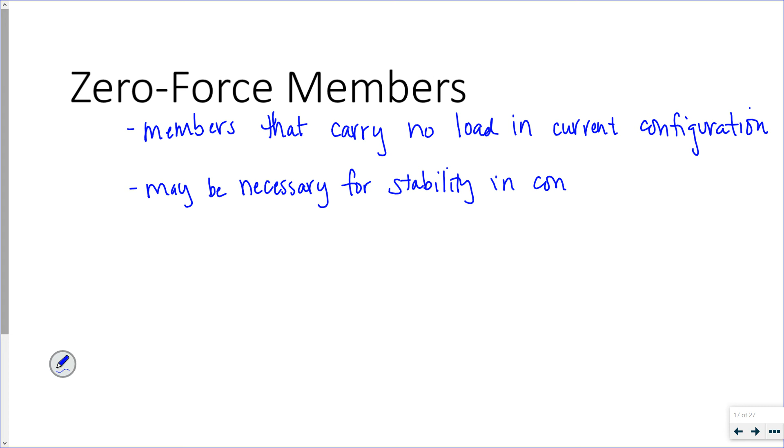So if it's not carrying any load, why is it there? Well, maybe it's necessary for stability during construction, and maybe it's not going to be a zero force member if the loading changes. So they're members that don't have any force in them currently, but they're there for a reason, or were there for a reason, or maybe for a future reason.

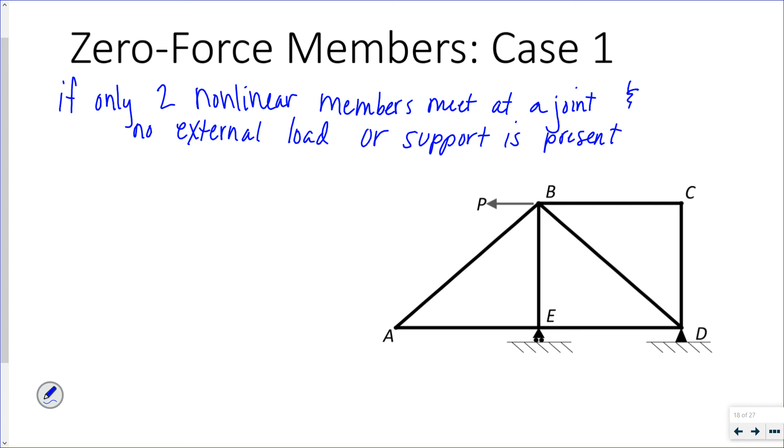There are two different cases of zero force members we can look at. Case one: if there are two non-collinear members that meet - non-collinear meaning they don't fall in the same line - at a joint, and there's no external load or support present, then both members must be zero force members.

That's why zero force members can change - if there is a load, this case doesn't apply. If the loading changes so there is a load at that location, so if they meet and they're not in a line together, and there's no force there, and there is no support, then there is zero force within that member.

There are two pairs of zero force members that meet the case 1 criteria, because there's two. One is if we go look at joint C. I have a vertical member and a horizontal member, and there's no external load or support. So that means that the force in BC is 0 and the force in CD is 0.

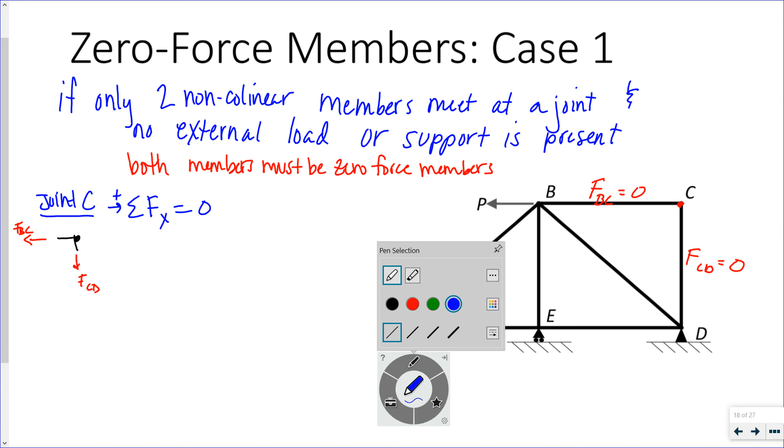How can I prove that? Let's do the sum of the forces at joint C. Sum of the forces in the x direction is 0. If I look at joint C, it has force BC and force CD. If I do sum of forces in the x direction, the only force at C is my force BC. Similarly, if I do sum of forces in the y direction equal to 0, the only force I have is force CD. So they're both zero force members. They meet the criteria for case 1.

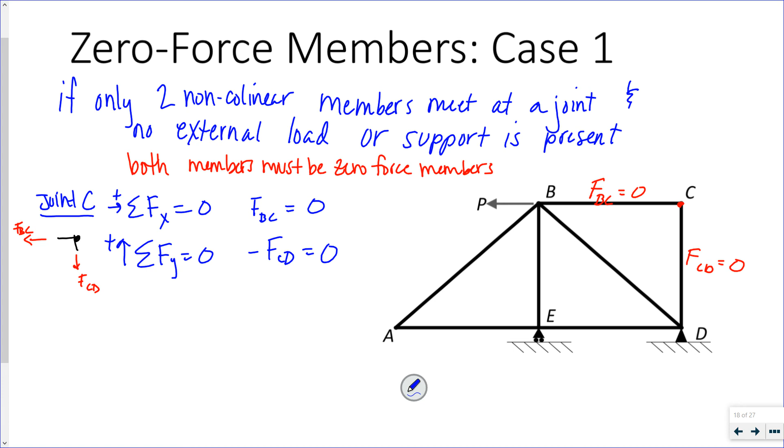Let's look at joint A. I have a horizontal member, FAE, the force from FAE - here's A. I have the force from that horizontal member. I have a diagonal member AB, and the force from that.

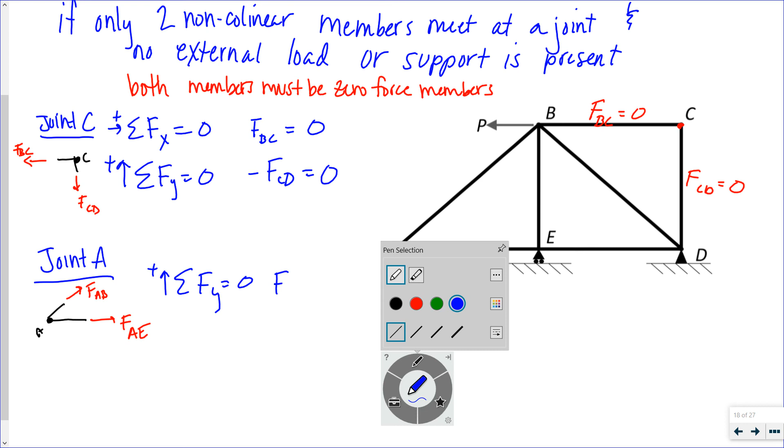Let's say I do the sum of the forces in the y direction is 0. The only y direction force I have is the vertical component of the force in member AB. So that means the force in member AB is 0. If I look at the sum of the forces in the x direction equal to 0, I should have my ABX component plus my force in member AE equal to 0, but I just said this was 0. So that means the force in AE also has to be 0.

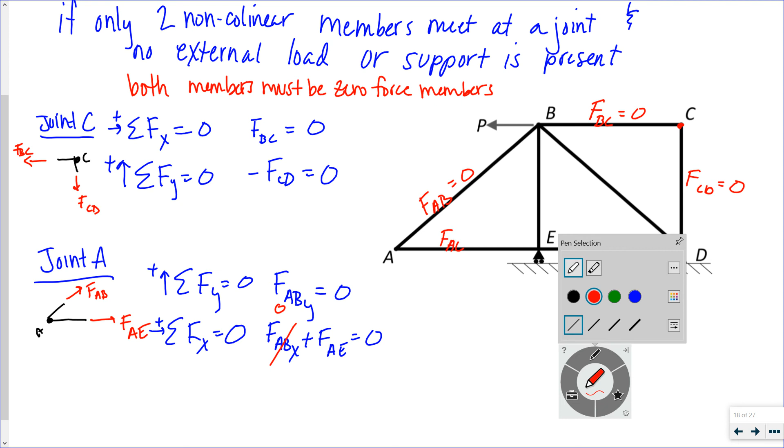If you look at joint A, there is no other vertical component unless I add a vertical load or a support that provides a reaction in the vertical direction. So member AB is a zero force member and member AE is a zero force member. There's also a fifth zero force member, and we'll come back to it in a minute.

Okay, so that's case 1. Case 2 is: if 3 members meet and 2 of them are collinear, then the one that's not collinear has zero force in it.

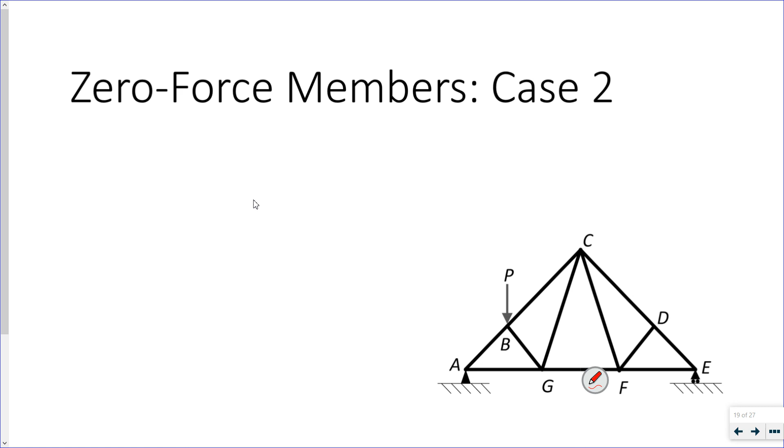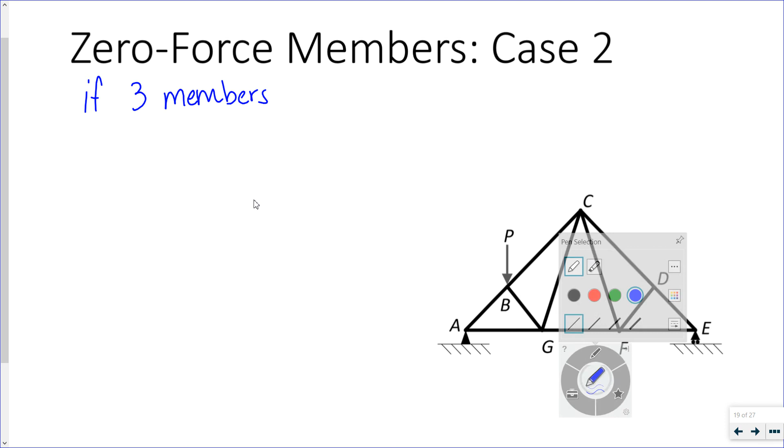Sounds like a beginning of a joke, right? If 3 members meet at a joint and 2 of them are collinear, then the third one feels a little bit left out - again, with no external loads or support at that joint. Then the third guy is like a bit of a third wheel here, and has zero force in its member.

So 3 members meet, 2 of them are collinear - they share the same line of action, their vectors are parallel - then the third one doesn't have any force in it.

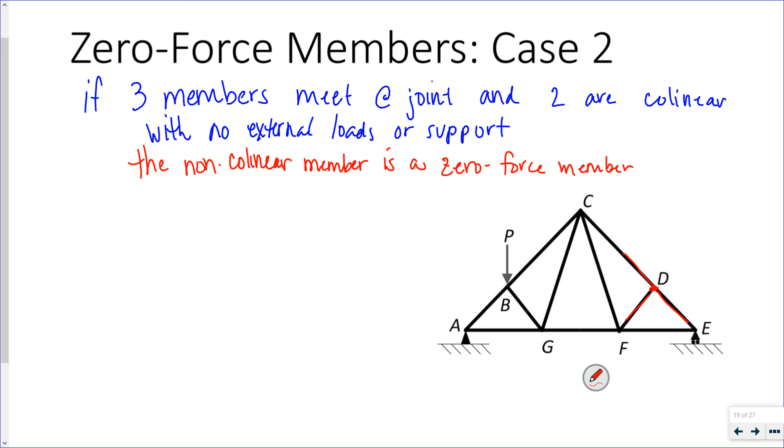There are actually 2 instances of this; one leads to the other. So the most obvious one - if you go look at D, I have 2 members that are collinear, CD and DE. Then this third guy, kind of third wheeling it - that means the force in member DF is 0.

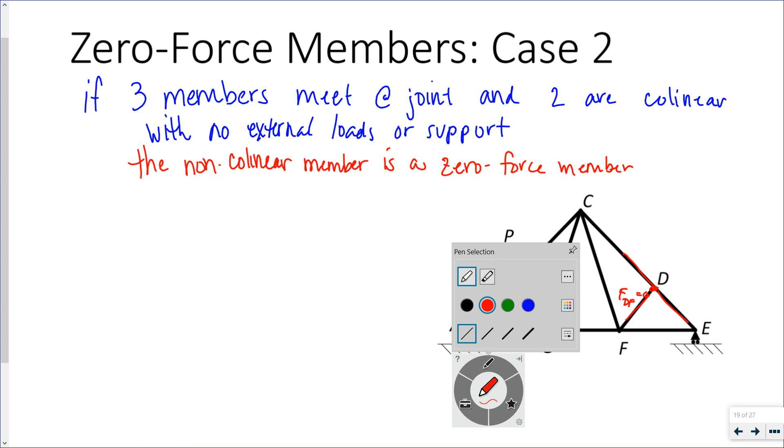Now how can I prove that mathematically? Let's look at joint D. It has these 2 members coming into it that are in the same line, and then the third guy that's actually perpendicular. So force DE, force CD, and then force DF.

One way to look at this, especially because this is perpendicular, is you can see there's actually a different coordinate system that's parallel to these members, that's in line with these members. X prime is parallel to member FD. Y prime is parallel to members CD and DE. And I can still take the sum of the forces about those two axes - I can just rotate my coordinate system.

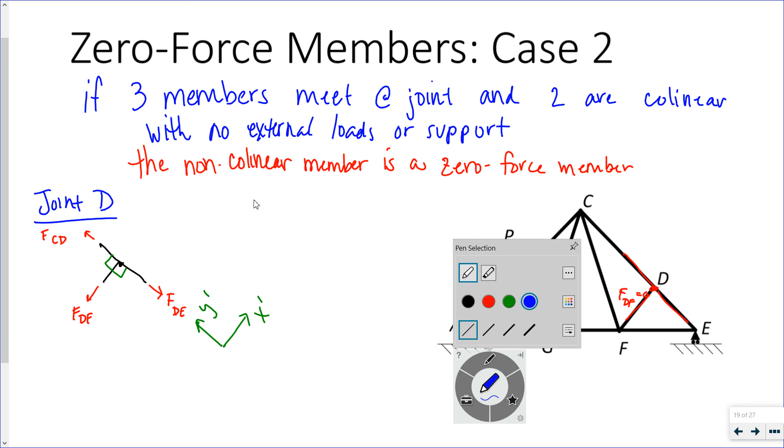Take the sum of the forces in the X prime direction, with F this way as positive. That sum is 0. The only force in that direction is the force in member DF, so that's why it is a zero force member.

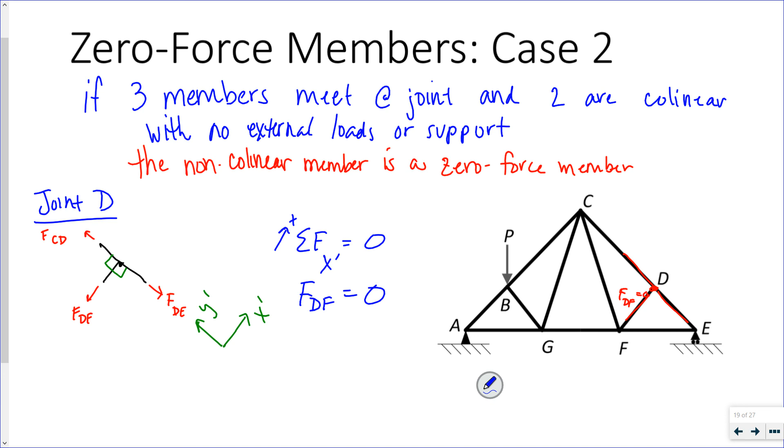There is a second zero force member. Basically, because FDF is 0, I have the same thing going on at joint F. If I look at joint F, I have 2 horizontal members, EF and FG. I have the force in member DF, but I just determined that was 0, and then I have member CF. So if I take the sum of the forces in the Y direction, the only one that has a vertical component, because FDF is 0, is the vertical component of the force in member CF. So that's how I get my second zero force member.

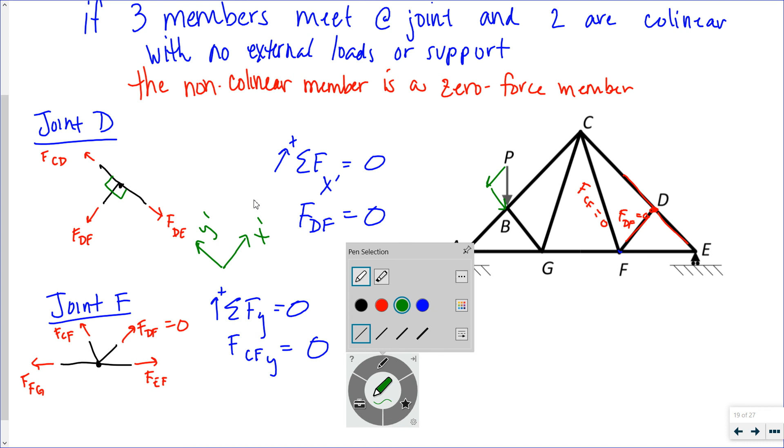Now if I go look, there is a very similar joint - B is similar to joint D, but the reason it doesn't qualify is because it has an external load on it. You see that load P, I can break it down into components, and you see one of those components is in the same direction as member BG. So member BG will have some load in it. If load P was up at C, then member BG would be a zero force member. Of course then member FCF would still be 0 too, and FCG would then be 0. And then really, what's holding things up? So that's why B doesn't work, because it has that external load in it.

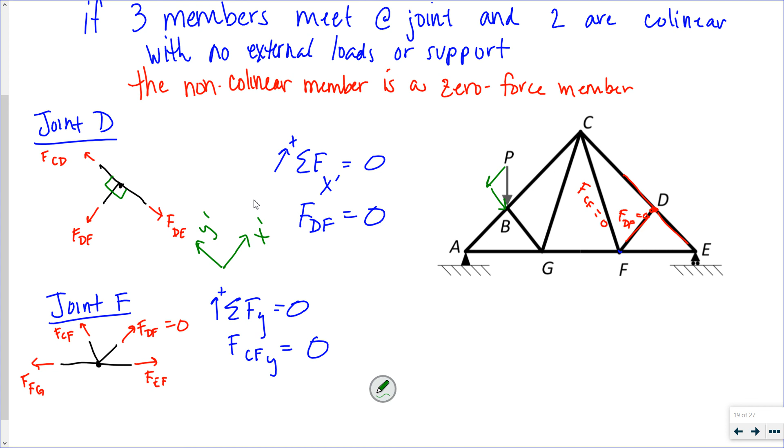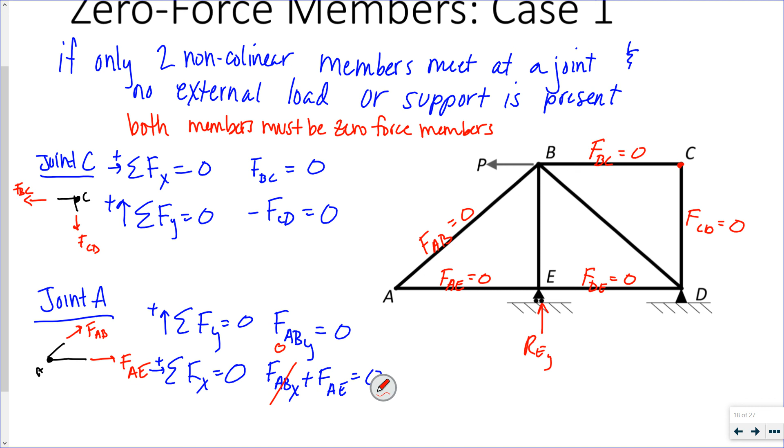If I go back to this case 1, has everybody found the 5th zero force member? It kind of looks like case 2, although it technically has a support. But the reason it qualifies is we look over at joint E - it only has a vertical reaction. So if I do sum of the forces in the X direction at E, I would have the force in member AE, which is 0, and the force in member ED, which now has to be 0, or DE, whatever you want to call that. If E was a pin, that would not be true. But because it's a roller and only has a vertical reaction, there cannot be force in member DE. So the only two members with forces are BE and BD. The other two must have been there for fabrication, or maybe if the load changes. But right now they're just kind of taking up space, maybe providing stability. So anyway, that is the two cases of zero force members.

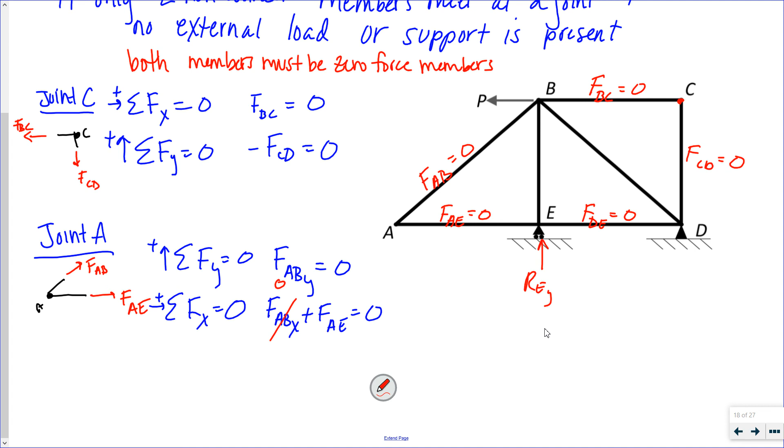So let's do an example. Not going to do any equations here, we're going to just kind of eyeball it. There are 5 zero force members. Take a minute and see if you can find all 5 of them.